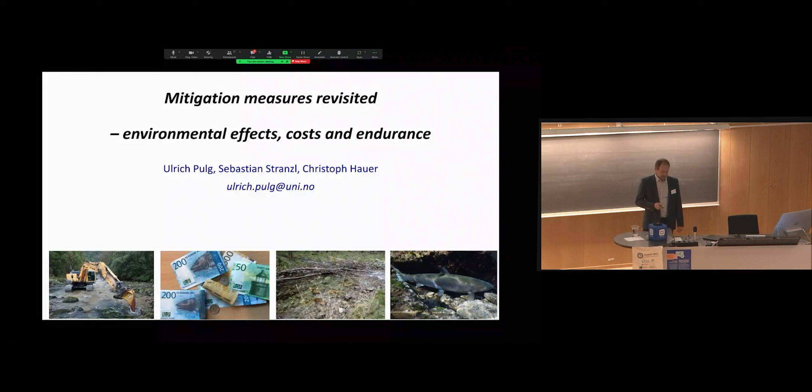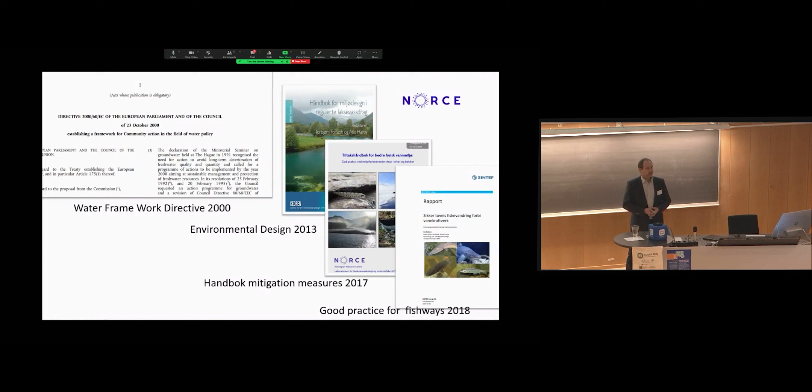We are about to jump right into the refreshment of the day, into the cool and clear waters of Norway. I have the pleasure to tell you something about the work of the last decades. You know about the Water Framework Directive, about the conflicts, about the problems, about the guidelines that have been published. And we have the possibility now to look how it went. How did it go? I present you now a bunch of projects that we were involved in, about the costs and how the effects were. And in the end, I will discuss them with you.

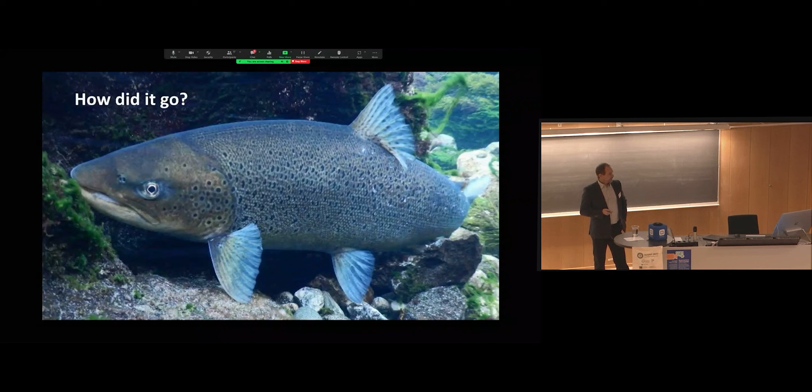We start right now with the ripping of armored layers. It's like plowing of river bottom, a typical effect when floods are lacking. The natural sediment transport is disturbed, and you get an armored layer. You can rip it. It works fine in semi-alluvial and non-alluvial river types, meaning that we have a glacial river bottom with kind of big boulders, about 50 centimeters, 20 centimeters, and we remove the fines, the clogged fines, and remove also a cover of moss that would usually be removed by floods.

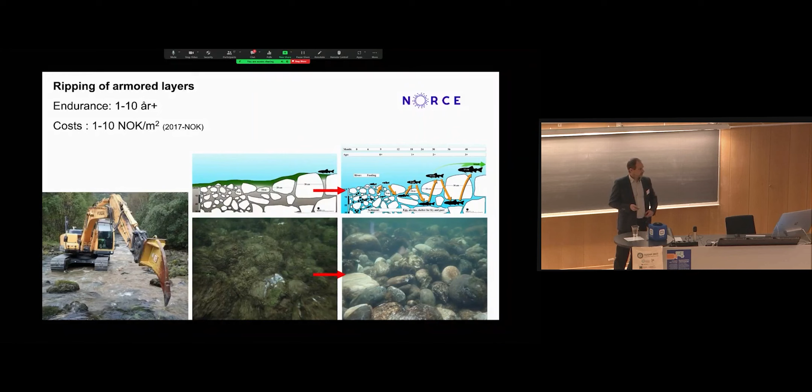We have costs of about 10 kroner per year, per square meter, and have had very good performance over up to 10 years. In alluvial sediments, we only had 1 year. So this depends very much on the sediment type and on the sediment transport. But in Aurlandselva and Suldal, up to 10 years expected, and we have had an amazing response of fish densities. Big juveniles of trout and salmon need cavities in the river bottom, they need shelter, and they respond very much to these measures with about a doubling of the parr densities in Aurlandselva and a tripling in Suldalslågen.

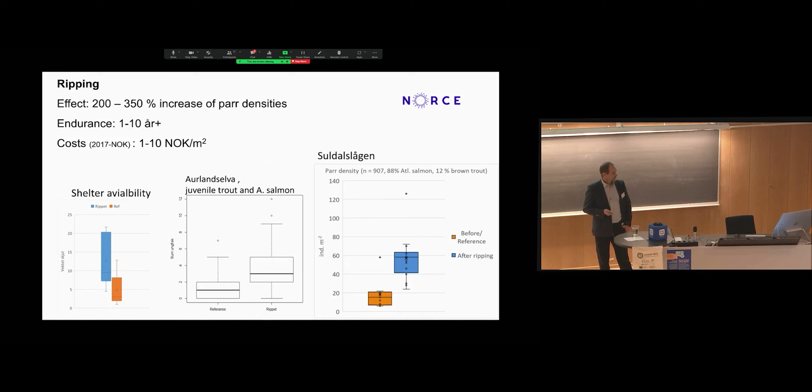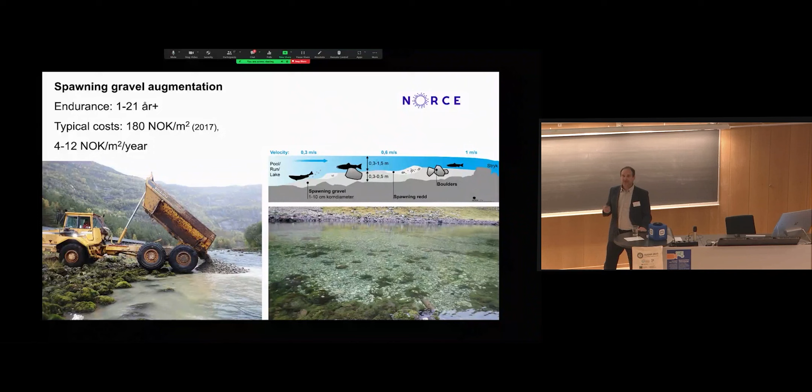The next one, spawning gravel augmentation, very widespread in the world, a very common mitigation measure. We have typical costs in Norway of 180 kroner per square meter. And I give you the year of these kroner, because the krone is in free fall at the moment. So it's very good to look at the year when this was measured or calculated. And additionally, you see 4 to 12 kroner per square meter per year. That means we have calculated these cases over the time they were functioning. In Aurland, for example, 10 years. And that gives us a good number including maintenance, refill of such measures.

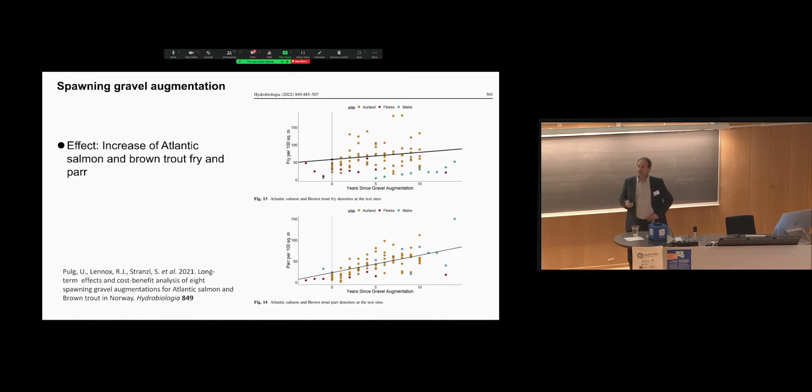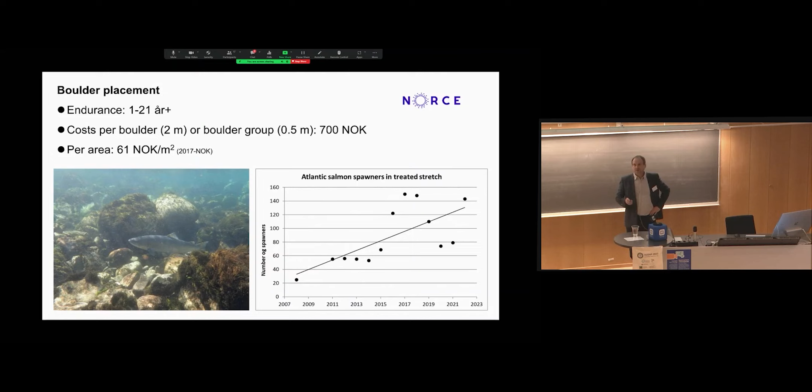Boulder placement, also a very popular one, especially in these rivers here in Norway, where we have natural boulders in a wide array of river stretches because of the glacial past of the rivers. Here we usually have costs of 700 kroner per big boulder or small boulder group, and if you calculate it per area, about 60 kroner. Also here we have a quite good response of fish if this is done properly. For example, on the right-hand side, you see the number of adult spawners in Frafjordelva, a channelized river stretch where this was done, where fish find more shelter and aggregate afterwards.

Also, juveniles can have benefits from such measures. Here, for example, data from the Teigdalselva, from Evini and Sven Erik, a colleague, who has measured these changes of fish densities in areas with and without boulders.

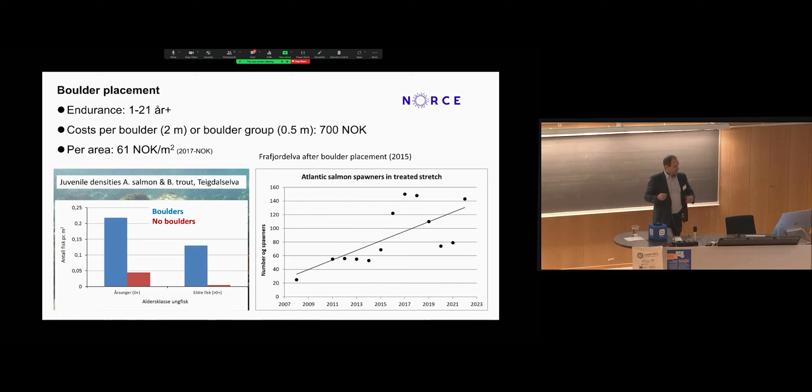Riparian vegetation, very important for birds, the vegetation itself, and insects, fish, and last but not least, bank stability. In these projects, we have about 28 to 98 kroner per meter of river stretch and have a very long endurance. If this is not taken down, it's working for a very long time.

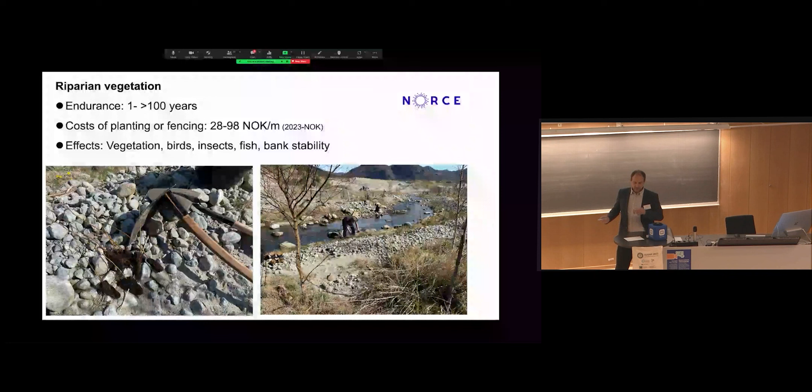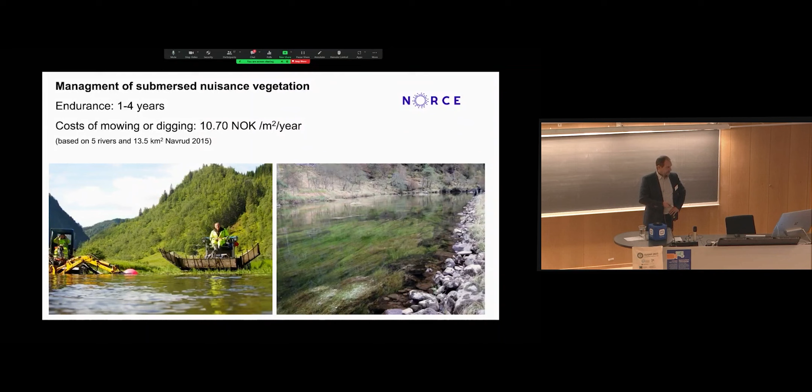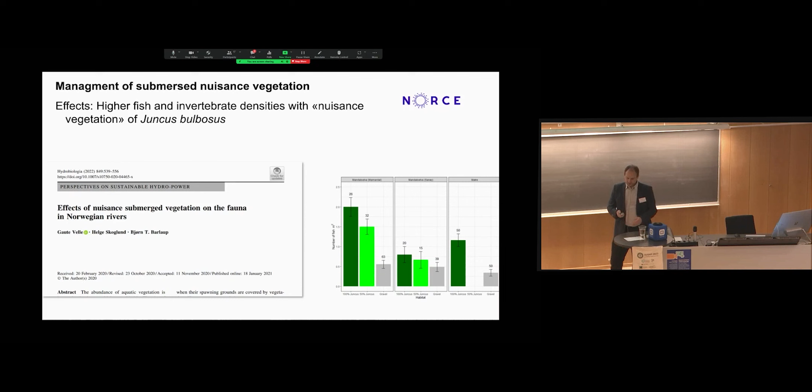Management of submerged nuisance vegetation: it's the Krypsiv, Juncus bulbosus in Norway, which really fills up some regulated rivers. And we have a big, long experience in the south of Norway with removing and maintaining such vegetation, about 10 krona per square meter and year, and have to think of the ecological effects. Gaute is sitting here, he has found that not all of this removal is very good for the invertebrates and fish because it makes a homogenized river stretch, and then you have lower fish densities and macroinvertebrate densities.

Environmental flows, do they work? Here an example from Dale-elva in western Norway. We have, of course, some high costs when we release water flows, and this is voluntary, but it also has a very important effect on the ecology. In this case here, presented by salmon and brown trout smolt production in this heavily regulated river, by applying these mitigation measures, including the voluntary water flow of 300 liters per second in the upper part of the river, we can maintain a quite big smolt production. These are measured here with mark and recapture, 9,000 to 14,000 individuals, which gives an okay smolt production for such a river type.

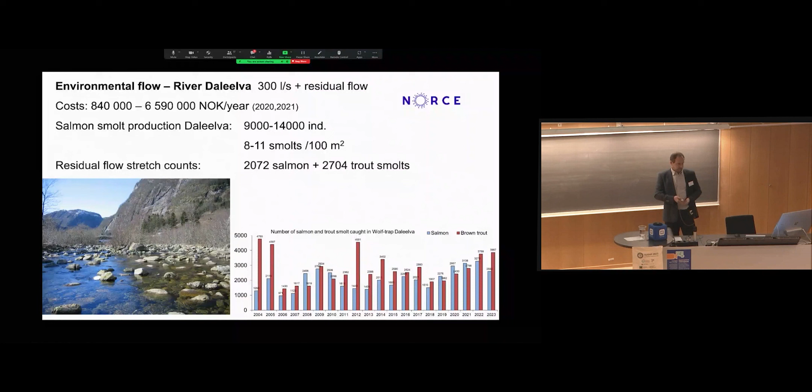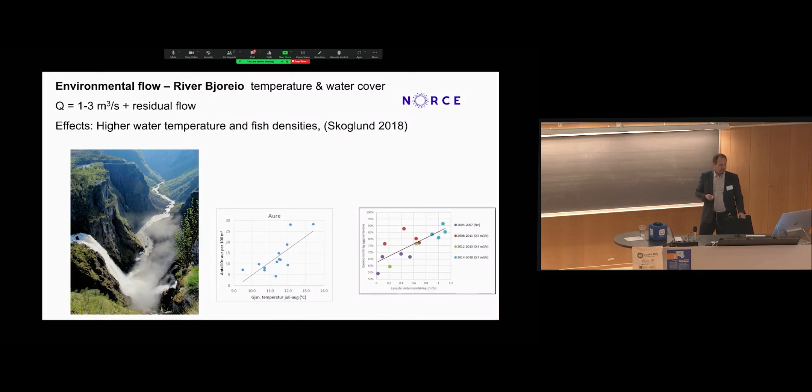The same applies for the Bjoreio River, where it was possible to adjust water temperatures and increase water-covered area by a higher residual flow. And this one didn't even cost anything because this water was taken from the tourist water flow of the waterfall. You've seen it in the beginning today. Anders Iversen showed the waterfall. And for this test period, it was the same amount of money that was spent, but it was much better for the fishes in this river, and it has a clearly positive environmental effect.

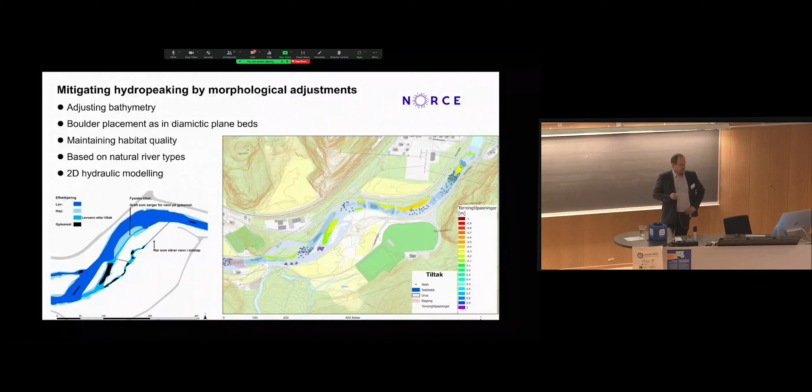Another one is mitigating the effect of hydropeaking, and this one is going to be presented by Sissel and Christoph tomorrow. It shows how we want to adapt the river bottom by applying natural river types to decrease the area that is going dry in hydropeaking, while we maintain good habitat quality. This is based on natural river types and 2D hydraulic modeling. More on this tomorrow.

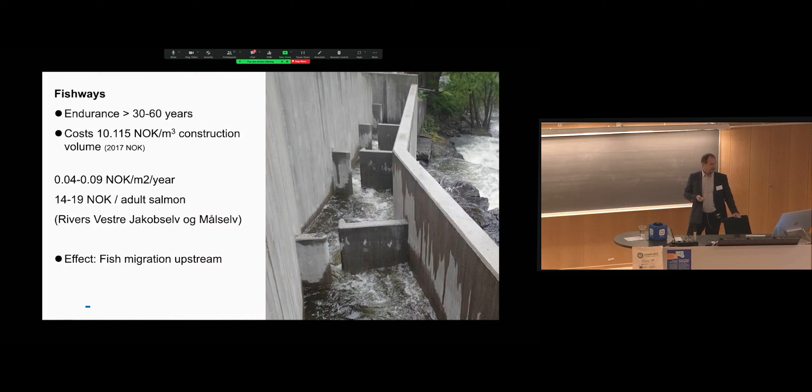Fishways. Here we have a much longer endurance and we have a very high effectivity calculated over time because we often can get a large habitat connected. And if you calculate it by the money spent and the area gained and the time functioning, you get a very good cost efficiency of 0.04 and 0.09 krona per square meter and year. Fishways in culverts. Here we have projects where we have about 20,000 krona per square meter for natural river bottom through culverts, working very fine. The river is going just through it, but it's very much cheaper to just put in a ramp in existing ones. It is also a solution that allows at least a migration.

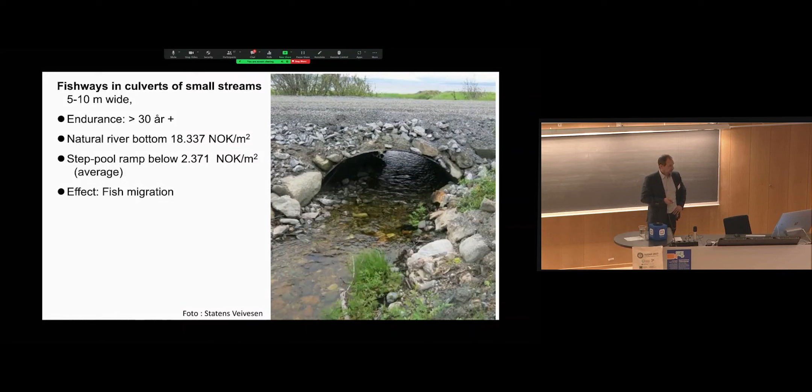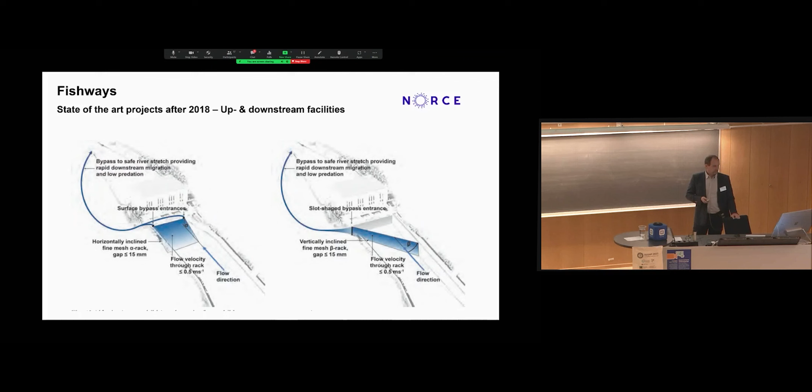The fishways for bigger hydropower installations, they have changed a lot today. You have heard from Oda already that we have new types of fishways in Norway that are addressing both downstream and upstream passage. And these are coming. They are coming now after these guidelines that we published 7-8 years ago. And it's really promising to see that this is implemented and realized in real life.

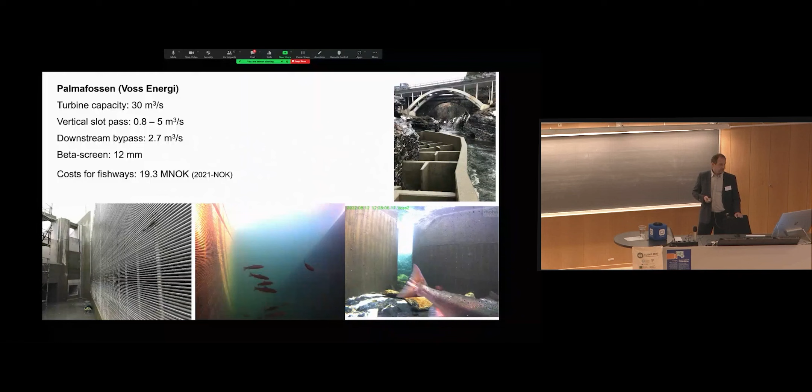Here the example from Palmafossen, 19 million kroner: the fine screen, it's a beta screen, 12 millimeter, and we have an upstream vertical slot pass of up to 5 cubic meters per second and a downstream bypass with 2.7 cubic meters per second. It's not completely evaluated, but the first monitoring results are really promising. We have fish going up, and we have fish going down, and have no fish seen on the screen or in the turbine so far.

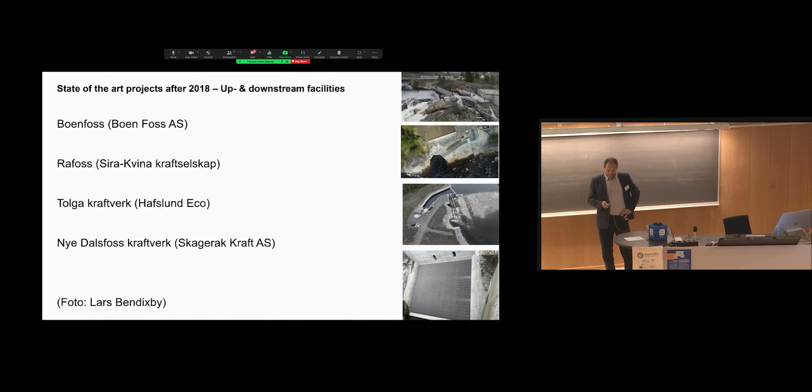Many new examples like that in Norway. That's really promising, and that's showing also that things are working. If we get new standards and new measures published, and people implement this, it's working. And I always remember the comment of the project leader in Voss Energi. He said, if the authorities demand this, we will do this.

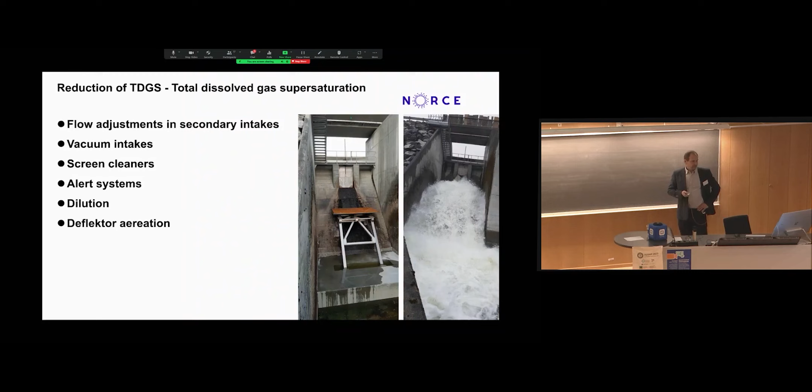Total dissolved gases are a problem in many Norwegian power plants, and we have big projects analyzing this, but here just a solution for a very simple method to aerate the water in the Odra River. We have installed the deflector here, together with Odra Kraft and O Energy, and we see a clear effect where we reduce levels of 120, 130% saturation down to values below 110.

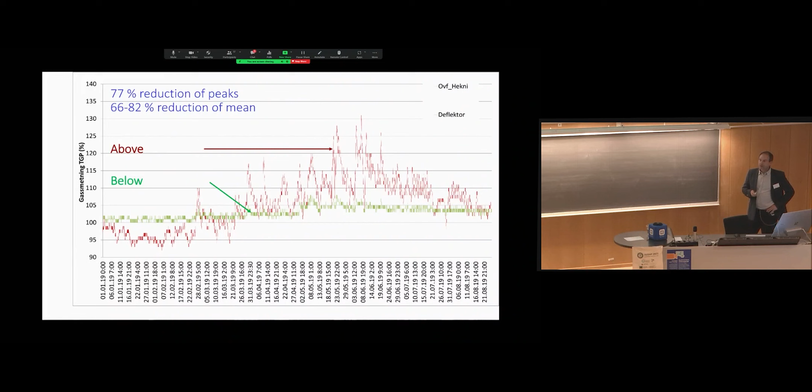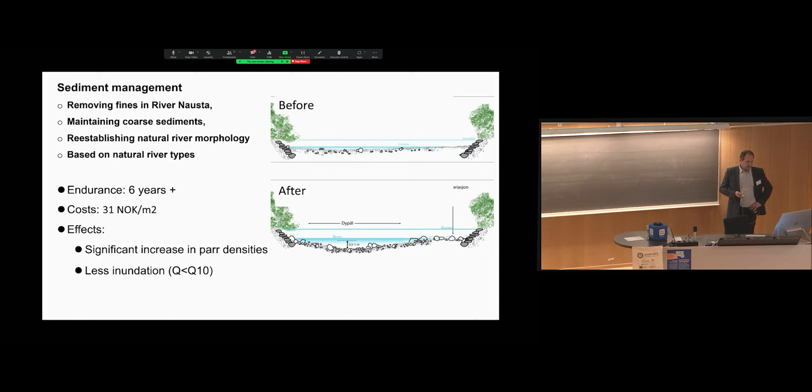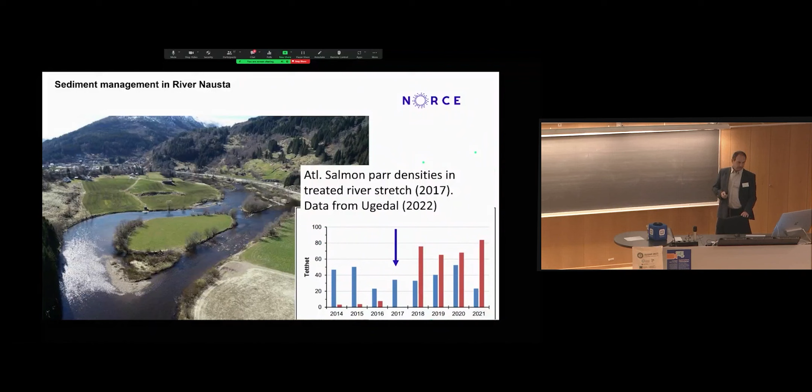We implemented the removal of fine sediments and putting back the coarse sediments while forming natural river types again. And this project had costs of 31 krona per square meter, works in 6 years, and it's still looking good. So this is working for a longer time with a clear response of the fish in this area. It is data from NINA, Ola Ugedal, who observed and monitored this area before and after. And you see here the arrow where the measures were done, and the red ones, the bigger parr of salmon that really exploded after these measures.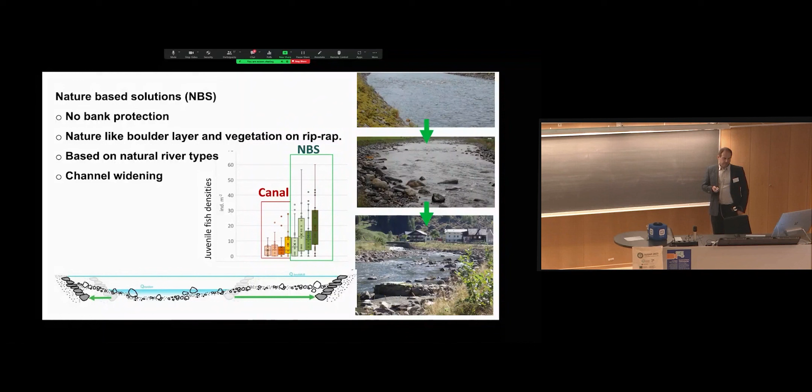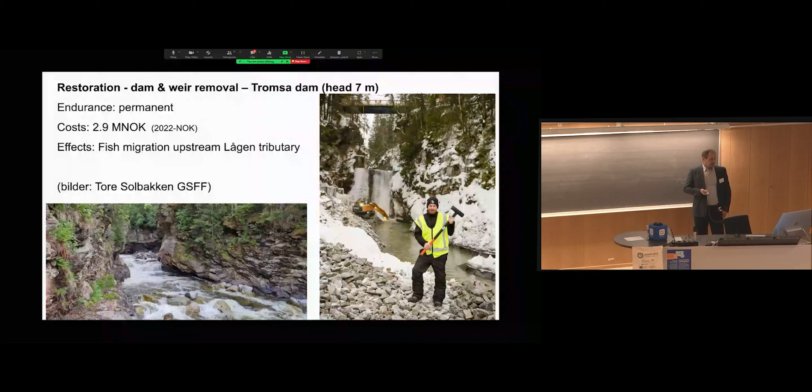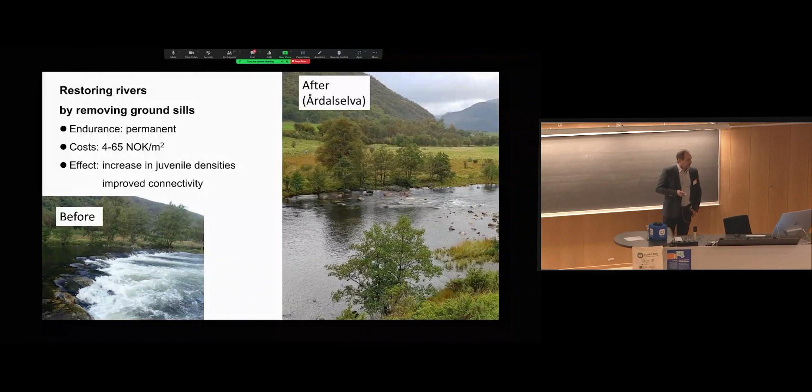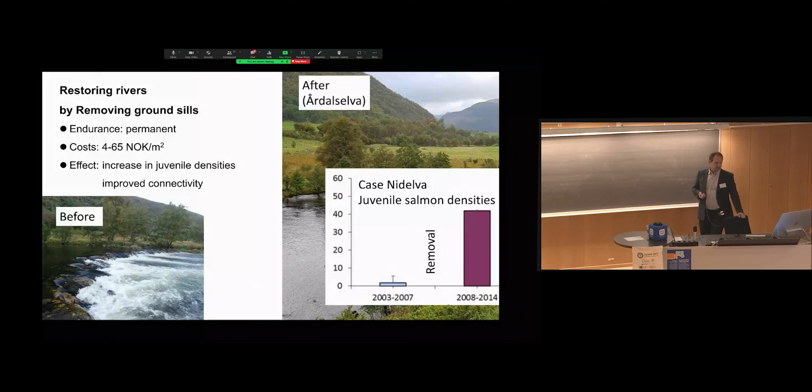Another one, dam removal, Tromsa, 2.9 million spent, mainly paid by the Miljødirektoratet, initiative of a local sport fisher association. Restoring ground sills, here an example from the regulated Årdalselva, working very well, 4 to 65 krona per square meter, works usually in the long run. And we have a clear effect here, data from Nidelva, where we have a big increase in juvenile densities after the measures. It goes from an impoundment to a river again.

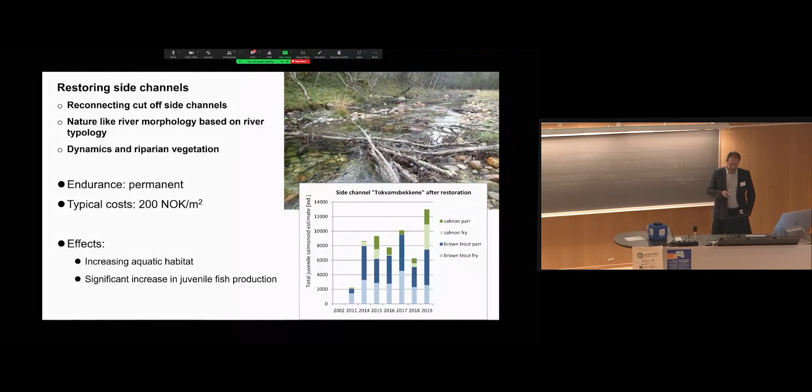Restoring side channels, very promising. Here data from the Aurlandselva, a regulated river, typical costs 200 krona per square meter. And we have a clear response from nothing, because it was dry, to a production of about 10,000 to 12,000 juvenile fish in just this one side channel. And these side channels, they have another benefit.

These side channels restore a part of the floodplain, and this floodplain then can help us to handle the big floods. Here is a flood modeling of Christoph Hauer and his colleagues in the Flood and Environment Project that shows how these black arrows here, how these water floods are going through this floodplain without destroying anything. On the right-hand side of the river, you see the red arrows. There the flood destroys houses and infrastructure that was placed into the floodplain. So this restoration has much more benefits than just for fish.

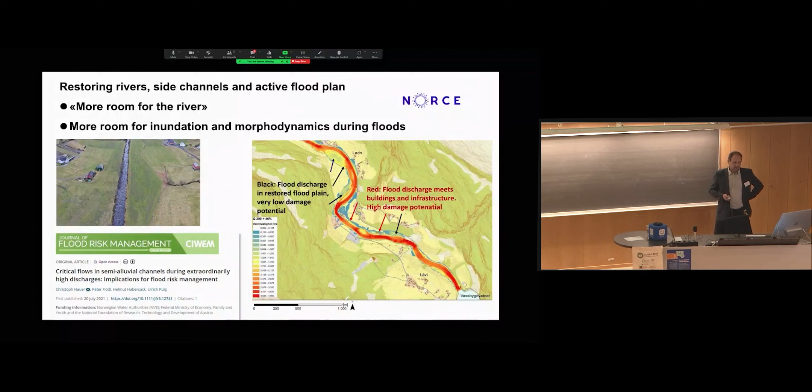Discussion and the summary. Out there are many good practice, many best practice solutions. It's simply to apply them. They're very relevant for the Water Framework Directive, for the relicensing, the taxonomy, and of course, they cost money. What I have shown here, for example. But you have seen that this money does not break the bank. If you calculate this over the time they're working, it's really not expensive. Another thing is that we have seen in these projects that good ecological status, not just potential, is possible in many regulated rivers.

Not all of them, but in many. And then you may have noticed that there is a big difference in the performance. I showed some good examples now, but I've also mentioned that there are projects that have just worked 1 year, or did not at all, or 5 years, not always 20 years, or 10 years. Why is there such a big difference?

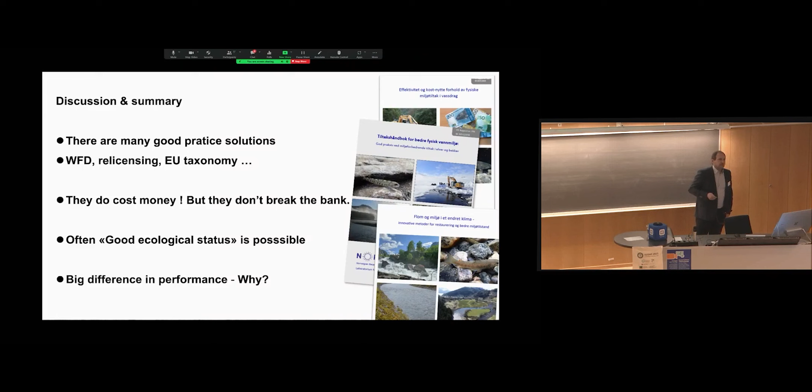It is because these methods have to fit to the river typology, to the hydromorphology of the river. It doesn't make sense to put in gravel in a steep cascade, and it doesn't make sense to put big boulders in a small river when the water is then going out below it. So that's why we have come up with this river typology and these publications in the last years. And we use this every day in our work when we analyze rivers and when we analyze the measures that we can use or not use.

And I'm very proud to say that we have a cooperation with Havs- och vattenmyndigheten and Miljødirektoratet. We want to establish a common Nordic river typology based on the very good work that the Swedish colleagues have done and the work that we have done in Norway. So when this is working, we have a good tool to have as a basis for the mitigation measures in future and for analyzing the rivers.

Remember, I've just said, if good ecological status can be reached in some regulated rivers, what does that mean? It means simply they should not be heavily modified rivers. By definition, they should be normal rivers then, and good ecological status can be reached. This is done in the rest of Europe, where many regulated rivers aren't classified as heavily modified. This is very relevant for Norway, where in principle, all regulated rivers are classified as heavily modified. Imagine, what if regulated rivers would achieve good ecological status, not just potential? Wouldn't it be great? Not least for the hydropower industry?

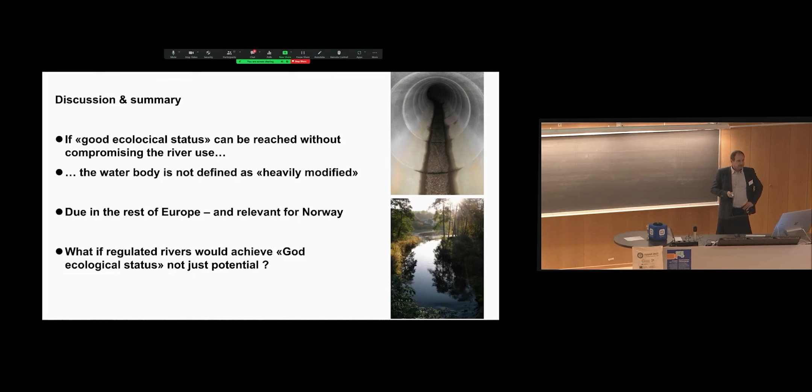We have learned that measures and their performance depend on hydromorphological conditions. The Swedish call it målbilder. The German-speaking countries call it the Leitbild concept. And this is a very good one because it is also the basis of the Water Framework Directive, the reference status. It makes very much sense, especially in Norway, where we have little impacts and still have natural conditions left. This is what the river would do anyway in the very big floods. So we work with nature, not against it. And that's what we call restoration. And that includes restoration of processes.

We remove the impacts. And I've shown this is also possible, at least partly, in regulated rivers. We can remove ground sills. We can remove small weirs. We can also restore side channels. This works self-sustaining and is often permanent and includes natural habitats of all species, not just salmon. And that's very important. We have learned this today. It's in the future not enough to address 1 or 2 species. We have to handle biodiversity and the nature crisis.

If we can't do this because there are so many impacts and we want to keep them, we can choose a lot of mitigation measures, but then we have to include maintenance. And that's why we come up with these numbers per year, and you can calculate maintenance and include it in your budget. Another one, when we go on now in the next 10 or 20 years, we can choose different roads. And I'm not against environmental design. I've been taking part in it. I have shown pictures, I have shown examples of it, and I'm contributing to it.